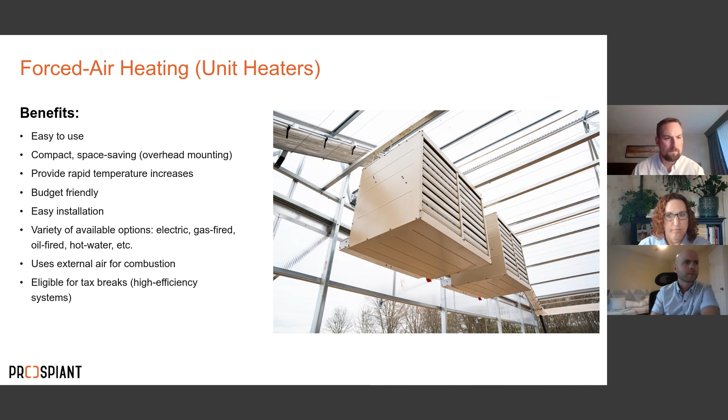So one of the nice things about the overhead unit heater system is it doesn't actually take up floor space, but one of the downfalls is it does create some shadowing. You do want to make sure before you install one of these, especially on a ground-to-ground style greenhouse, that you can actually support the system off your structure. I have seen people do some workarounds in the past where they've had them on stands.

For the most part, almost all greenhouse structures are really going to be able to handle that additional loading, but you definitely want to ask a greenhouse professional before you try to hang it off your structure, just in case it's an older structure and it wasn't ever designed for that kind of dead load.

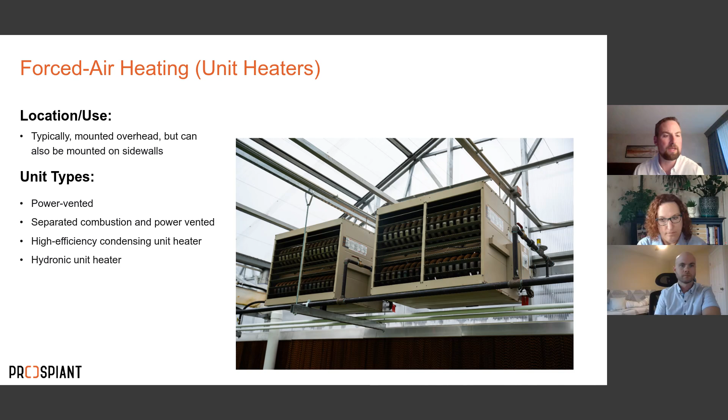So the basic types of units we have are power vented, and we'll expand on what that means here in a second. Separate combustion and power vented. There's also high efficiency condensing units, and there's also units that run off of either steam or hot water. So, when you walk into a greenhouse and you see a unit heater, a big box overhead, there's several different methodologies or several different types of systems that could be. It's not just one size fits all.

So to talk a little bit about some of the common pitfalls I would recommend to avoid, and the things that we see: these units come in discrete sizes. So typically they're sized in 50,000 BTU blocks from 150,000 or 200,000 all the way up to 400,000. Usually they're limited at 400,000 BTUs. And sometimes what we see is just incorrect calculations to start with. No one ever really put pen to paper to figure out the size of the units that they actually need and what type of delta T they can expect to have inside the house.

But the other thing is, when we're talking about efficiencies and cycling of these units, if you have them too large or too small, then they tend to cycle a little bit more and be a little less efficient to use. So, for example, let's just say you only need 200,000, but you have a 400,000 BTU unit. It's going to turn on for a short period of time and then turn back off again, and cycle more frequently than the 200,000 or 250,000 BTU unit that would stay on more consistently. So that's something to consider.

Wrong locations and arrangements are something we see oftentimes too. It's not uncommon for us to see people try to save some money by not having to run as much gas line. Typically what they'll do is put more than one unit heater on the same end of the greenhouse, and then rely on mixing fans to get that heat to the far end, or oftentimes we see two unit heaters put on the intake side of the greenhouse, the pad wall side or the vented side, and nothing on the exhaust fan side, and it might be a 150-foot long greenhouse. So obviously you're not getting great uniformity with that design.

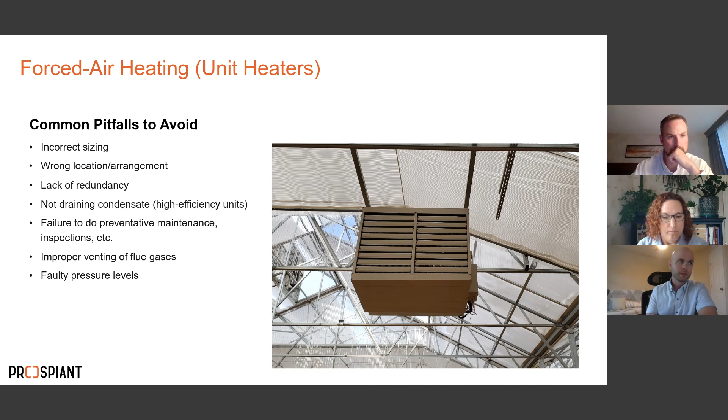And then the placement is also important as well, making sure that you account for what we call the throw of the air that comes out of the unit here, making sure that it can reach all the spaces adequately and that you have even distribution. So a larger house, like you said, it may be better to divide up into two 200 MBH unit heaters instead of a single 400 one.

Going on to what we were describing earlier with the power exhausted versus separated combustion unit heaters. Those are going to be your two main types of gas unit heaters. So we're talking about gas unit heaters here and how the combustion chamber and flue venting is organized. The power exhausted type of unit heater is going to be your standard base design. It has a single flue vent that's going to exhaust the flue gases to the outside, but there is no combustion air intake vent. It actually pulls in combustion air from inside the greenhouse itself.

And then in the separated combustion example, that unit heater is going to have two flue vents, one for the exhaust going outside, and then a second one that also goes outside that pulls in combustion air. What it does is it creates neutral pressure within the greenhouse, and a lot of the higher efficiency models of unit heaters also are going to use that separated combustion type of arrangement.

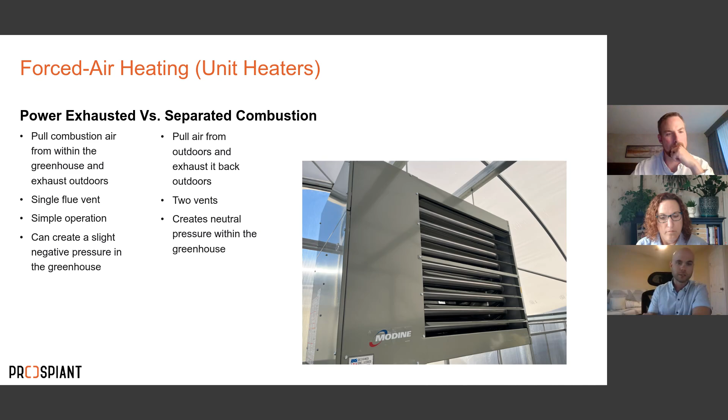And then going into the efficiency, kind of segued into the last one. Our standard efficiency unit heaters are going to be what we call non-condensing, so they won't have any condensate piping that comes out of them. Typical standard efficiency unit heaters are going to be about 82 to 85% efficient. But what we see more and more demand for are high efficiency unit heaters, which are operating in the 92 to 97% efficiency range. And the way they work is they condense.

And by condensing, I mean there's condensation that forms in the flue gases itself because it draws more energy out of the flue gas, so it brings it to a lower temperature at which water will condense out of it. So one thing you have to be aware of when you're working with high efficiency unit heaters is that you have a separate condensate piping line that you can route to.

And that condensate is typically slightly acidic, so you want to keep in mind that anywhere you run it, typically you have a filter or scrubber of some type that helps reduce the acidity level. And if you don't drain this properly, pipe it out properly, and you have it just piped right to the concrete slab, or it touches any part of the greenhouse, what you see oftentimes is corrosion from that condensate.

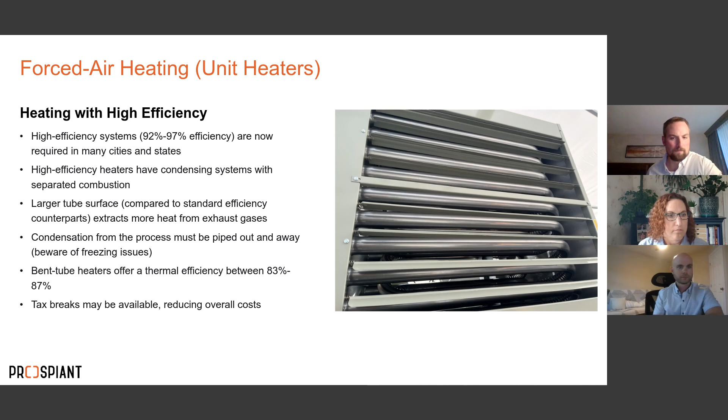And then next we can jump into the hot water radiant heating systems. So this is going to be our next level of heating systems that we have for greenhouses. Going into what we were talking about with the unit heaters, some of the why that's a base option and why this hot water radiant is an upgrade option. One of the cons of just using forced air unit heaters is, even if you have good distribution of unit heaters, you're still not going to have perfectly even heat distribution within a space.

And then also all that forced air, depending on the crop that you're growing, can have a tendency to dry out the plants because you're using a lot hotter stream of air that can blow directly on the leaves, depending on how it's oriented. And just based on the hotter streams of air coming out of the unit heater, you're going to have a little bit of uneven heat, but more so uneven humidity, especially in the wintertime. You're going to have pockets of humidity and then pockets of really dry areas right inside the path of unit heaters.

So the upgraded option that we see on a lot of both institutional and commercial grow facilities is what we call hot water radiant heating. This does not use any forced air. What it does is it uses hot water radiant heating elements, either heat pipe or fin tube, to radiate heat outward in a more gentle sort of way.

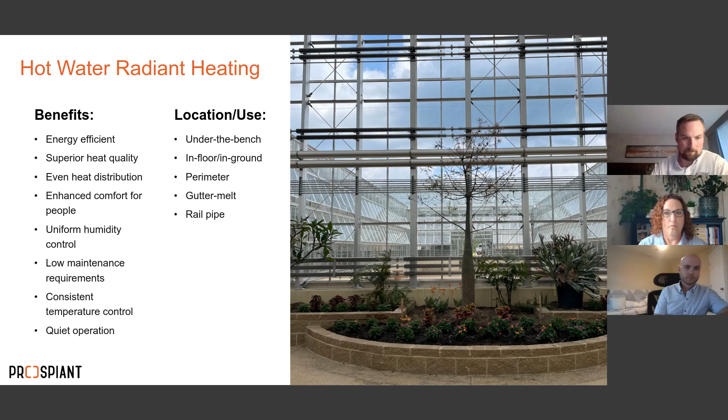Absolutely. And we'll get a little bit deeper in the next couple of slides on those various delivery methods and locations. Going into this next slide, kind of reiterating what I had said earlier about the benefits of the radiant heating system compared to unit heaters.

Gentler, softer heat, modulate. And one thing I didn't state earlier is there's also the ability to modulate this heat delivery. So not only is it distributed evenly, but the modulation itself reduces some of the cycling that you may experience with unit heaters, where you don't have this on, off,

but the control system can actually detect what that appropriate radiant element hot water temperature should be to maintain that space, and you'll get a much more even heat delivery, not only from an area standpoint, but also from a timing standpoint, throughout the day.

And then the other benefit would be, like we said, the different delivery methods for targeting zones. Unit heaters are typically only overhead. There are a couple unit heater arrangements where you can have them under bench via ducting. But if you do that with unit heaters and you don't control that temperature in the ducting, you still run the risk of overheating

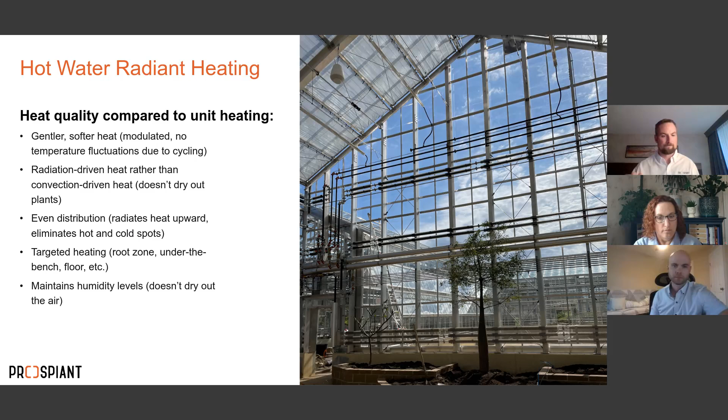So, say for example, forced air. Sure, it's heating your space. It's doing that benefit that you need. It's keeping your space from freezing, keeping the leaf temperature at the target temperature, but it's also driving growth. And so that's one thing that's different. I mean, everyone needs heat, right? More or less, everyone needs heat in the greenhouse, but this is a crop steering tool almost. That's right.

Now we can get into different types of delivery methods and types of radiant heating elements themselves. First, we'll go into what we're going to call radiant fin tube. This is typically going to be what we call aluminum fin tube. So it's aluminum piping with aluminum fin on it. This is going to be very popular for institutional greenhouses as well as some of the smaller commercial greenhouses, I would say up to maybe 1 to 2 acres in size.

And one of the benefits with this, first and foremost, at least with institutional jobs, is the aesthetics of it. Being aluminum on aluminum, it matches the same material of the aluminum structure that we often use for institutional greenhouses. So you're never going to see any of that corrosion that you'll see in other types of heating methods. There are other radiant elements used commonly in the building industry, not greenhouses, that are copper fin tube.

And I've seen them used in greenhouses, but we don't usually push that method, because anytime I walk into a greenhouse that's more than 10 years old that has copper fin tube, it's green. It still functions fine, but it just does not look good. It's green and black and all discolored, just because of the higher humidity levels that you have in the space. The aluminum fin tube looks pristine after 10, 15, 20, 30 years. It does not change. So aluminum is definitely going to be our preferential method there.

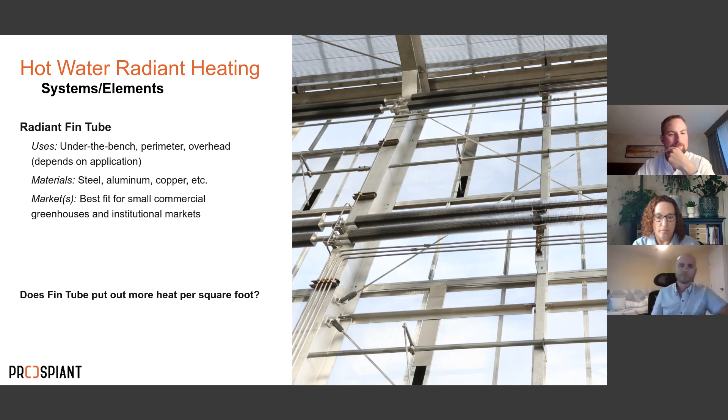And then it also goes out from there. There's going to be rail cart heat piping, crop heat piping. And all this is typically, there's two main sizes of piping that we use: either we call it 51 millimeter OD or 38 millimeter OD. And it's just bare steel pipe. It's painted so that the painting itself, that's what's going to prevent it from corroding. And then it just radiates out.

The market that we typically use this in is going to be large commercial greenhouses and produce. I would say typically more than 2 acres in size is going to be your better benefit for it. And the reason is, it does give you more even distribution, and this piping does better for larger spaces because of the size of the piping and the flows can carry longer distances. The piping itself does not radiate as many BTUs per linear foot as fin tube does. So you wouldn't want to use it in small greenhouses, small commercial, institutional. The flows don't work out that well.

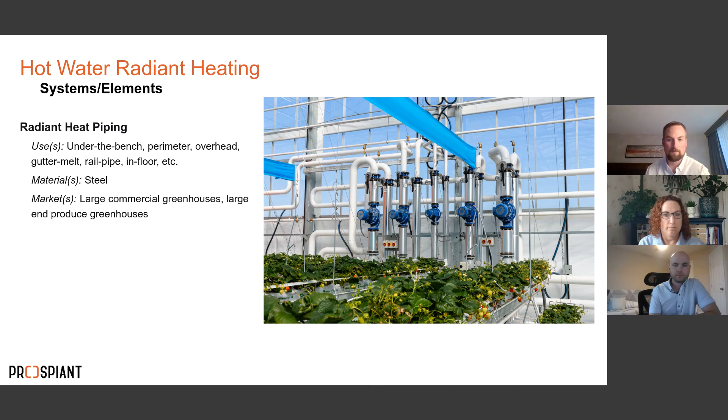And so, yes, it's quick to install the aluminum system. That's one of the pros of it. It's really quick to install, but when they're doing it at scale, it makes more sense to get a welder out to the site and have them weld the pipe up. And actually you could do that at a much lower cost when you start to talk about a larger scale. Absolutely.

Oops, sorry, Jared. I skipped ahead. So one of the most common forms of heating that we see. The final system that we have. Yep, there we go. Sorry.

So one of the most common types of heating systems we see is the PEX system here, the in-floor heat system. Very, very common with flood floors. Also pretty common anywhere you want to have the ability to evaporate any water that touches the ground pretty quickly. So we'll see this on a number of different institutional or very high-end greenhouses, sometimes even in a retail space where they're just worried about somebody slipping on some water. So this will help evaporate it really quickly, and creates a very comfortable environment. It also helps you steer your crop when you actually have the crop on the ground.

When you start to raise your crop off the ground, it becomes less necessary to have the PEX in-floor heating system. But we see it in almost every type of market. It's very common with the large wholesalers. It's common anytime you have a container touching the floor. It helps to drive plant growth, drive the root ball a little bit more, so you have more irrigation opportunities. And it's a pretty flexible, no pun intended, pretty flexible system. We can add capacity to it.

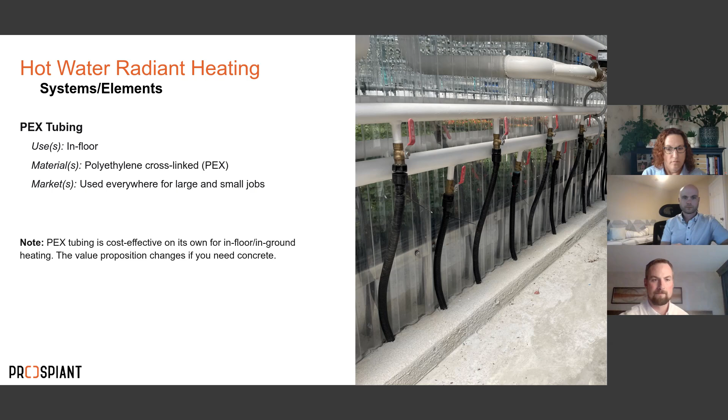And then in summary, in choosing the heating system, these are the various factors that you want to consider. We went into a lot of these earlier with the different types of systems, but obviously the size and layout of the greenhouse is going to dictate. It may make one system more preferential than another. For example, in radiant heat, specifically the layout when it comes to the plants, if you're growing plants on benches, that works really well for some sort of underbench heat.

And then also even in heat pipe systems, vine crops, for example, we almost always use what we call rail pipe heat, where the carts go up and down the rails to serve the vine crops. Whereas if it's in an NFT system, it would be similar type of radiant heat pipe, but it would just be called underbench. But either way, all those systems, whether you have vine crops with floating gutters, NFTs, or just plants on benches, allow you plenty of space underneath to run some sort of radiant heat.

But if you are not growing on benches, say you're just growing on the floor, either a flood floor type system, or Bato buckets or pots on the floor, you can't run that type of system. On that type of job, if you're doing radiant heat, in-floor PEX heat would be your main answer to achieve that. And then also going back to institutional houses, which are primarily for people, and plants are kind of to the side. You're never going to have underbench heat in those types of jobs unless it's an R&D institutional. And that's where radiant floor heat also makes the most sense, just to heat the pathways and everything that people walk on.

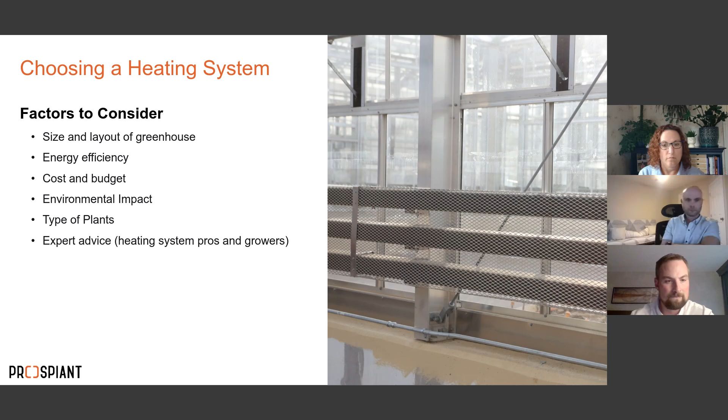And then finally, choosing the right heating system, proper sizing calculations. That's one of our expertise, not only installing and designing the systems, but we're always going to start with that initial heat load and then find the best system that works with your budget within the greenhouse layout.

But going a little bit deeper into the calculations itself, the things that you want to keep in mind are going to be the greenhouse size. Obviously, that's going to be your first parameter. Then the glazing material. Different glazing materials, of course, are going to have different heat losses. If you're looking at just single pane glass or corrugated polycarbonate, those two materials are going to be a lot higher heat loss than, say, if you have a type of twin wall material, such as twin wall polycarbonate or twin wall acrylic.

And we can go even deeper in that. There are triple wall systems. Typically, those are only used in institutional applications, but you do get more and more returns as you use those different materials.

And then going with the glazing material is the heat retention curtains and the blackout curtains. So the heat retention curtain, it's key. It does two things. In the daytime, it's going to be a shade curtain. We use it for shade systems in the daytime to reduce the solar heat gain and keep those daytime temperatures below a certain level. But it has a dual purpose of heat retention at night, specifically in the wintertime at night.

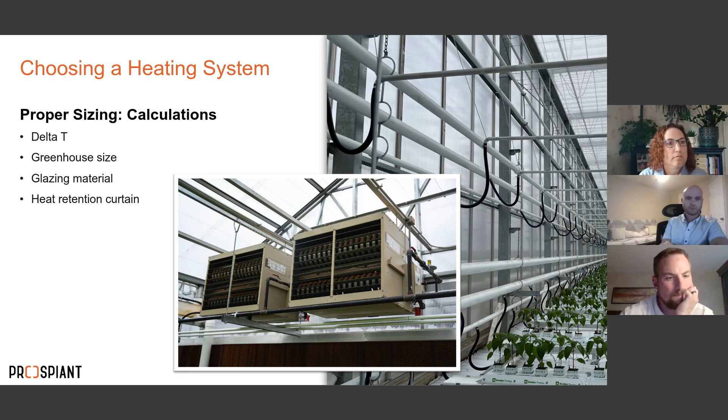But there's another form of delta T that's used specifically with hot water radiant systems, which is the delta T of your hot water supply and return. You have to make sure that you size that adequately so that you know how much flow and therefore the sizes you need for your pipes in the system. And then Paul, if you want to take the last one.

Okay, certainly. So just to summarize all this, I tend to look at a couple different things when people start asking about heat. First and foremost, I think about the application of the greenhouse. If you're going to just have a general greenhouse and you don't have a sense of what you're going to be using it for, then going the hydronic heating route might not be the best call for you.

If you know exactly which crop you're trying to grow, you know what delta T you're looking for, and you know what kind of heating scenario you want to run throughout the greenhouse. So most of the year, I want to have this base load heat just to drive plant growth, and then in the darkest, coldest winter days, I want to be able to quickly increase that heat inside the greenhouse. These kinds of things come into play a lot when we're talking about how we design the greenhouse for maximum efficiency, to minimize capital costs and operational costs.

They all kind of come together as one big kind of collage to tell us which direction to guide you. And so talking with a professional greenhouse heating company is going to be the key to sizing and designing the proper greenhouse heating system for you. That would take into account all the things that Jared just mentioned, the delta T outside, the glazing systems, whether you have the energy curtains or not, often called shade curtains.

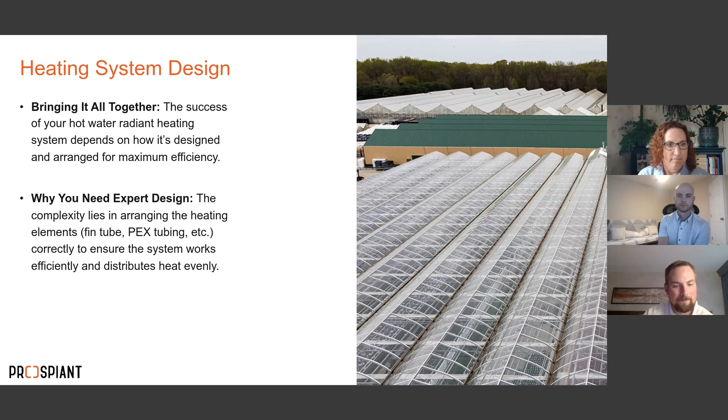Jared, do you want to talk a little bit about what we do? Yeah, absolutely. So kind of summarizing everything that we just stated. What we do, heat load calculations, to ensure the proper system sizing. We're going to start there. That's the very first thing we do whenever we get a quote request. We always start with the heat load calculations, with the basics, the greenhouse size, layout, glazing material, shade curtain material, what kind of temperatures you're trying to achieve, et cetera. And then we'll go on from there.

We'll design the entire heating system, and we'll customize it to your greenhouse. It's going to be customized based on your crops, your plants, what you're trying to achieve, and also within your budget. That's the key too, is there's always a good, better, best type of levels of systems that you can look at.

And then once we get a design contract, we're going to lay out all the system elements for optimal heat distribution based on your crop needs, and we'll deliver that in our design drawing package. And this will be a fully designed and engineered system, ready to go for our next step when we do the furnish and install contract, to then go and procure everything and then take care of the installation.

Then, Paul, if you want to do the services. Yeah, so of course, in addition to the sizing and the coordination, talking about what the crop's going to be and what the grower's heating plan is going to be for their greenhouse, we'll help also coordinate the control side.